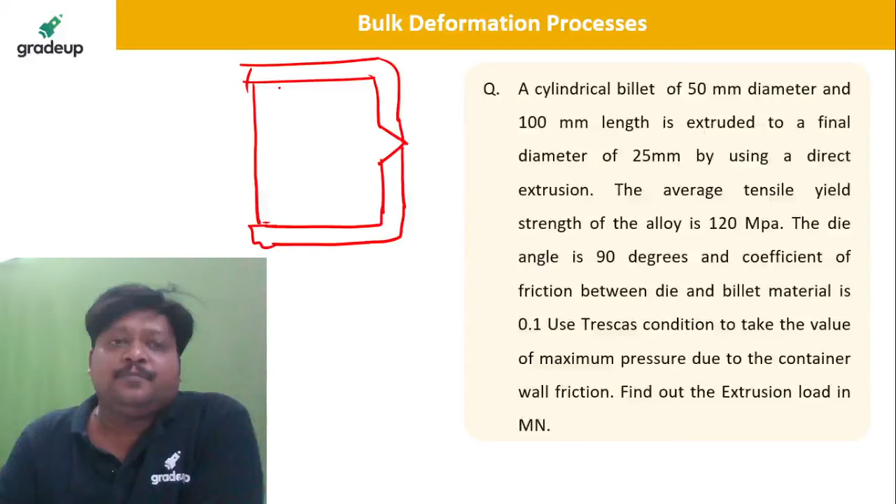If this is a rigid wall container and there is a die, having an included angle given as 90 degrees, so of course I have to show some space, orifice to... suppose it is here like this and you are getting the product here. This is the ram, this is the ram, and this is the billet.

So now here the billet material, cylindrical billet, has 50 mm diameter. So diameter is given, 50 mm. And the length of the billet is, actually it is 100 mm.

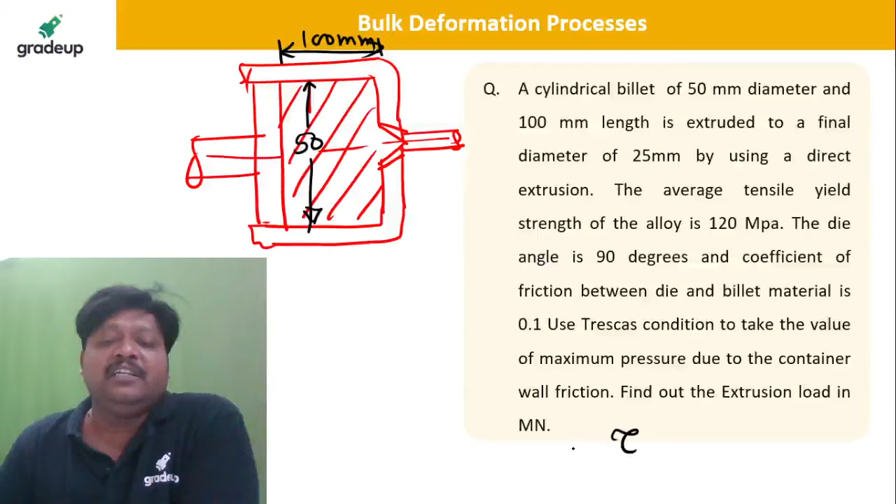So definitely the container shear stress is going to come into the picture, which they say is found by using Tresca's condition to take the value of maximum pressure due to the container wall friction, that is tau we need. Because of the container wall friction, the frictional force or frictional stress we have to calculate will be equal to 4 tau L divided by D, or D naught, the original diameter of the billet. For that, using Tresca's criteria, take that maximum pressure due to container wall friction. So how much is the tensile yield strength? It is 120 megapascal.

Using Tresca's criteria, this tau will be equal to sigma y by 2, which is 120 divided by 2, that is 60 megapascal. That will be the frictional stress.

Frictional shear stress on the wall of the container we have to take into account, which is other than the drawing stress sigma d, isn't it? So tell me, yes, first what do we need to do?

So original area is how much? Original diameter of the billet, D original, I will write here, D original 50 mm. D final, what is the product diameter? Final diameter cross section, to a final diameter 25 mm.

Then what they are saying, the sigma y or sigma flow is given, the die angle is 90 degree, so that is alpha, you have to take it as 45 degree. The coefficient of friction mu is 0.1.

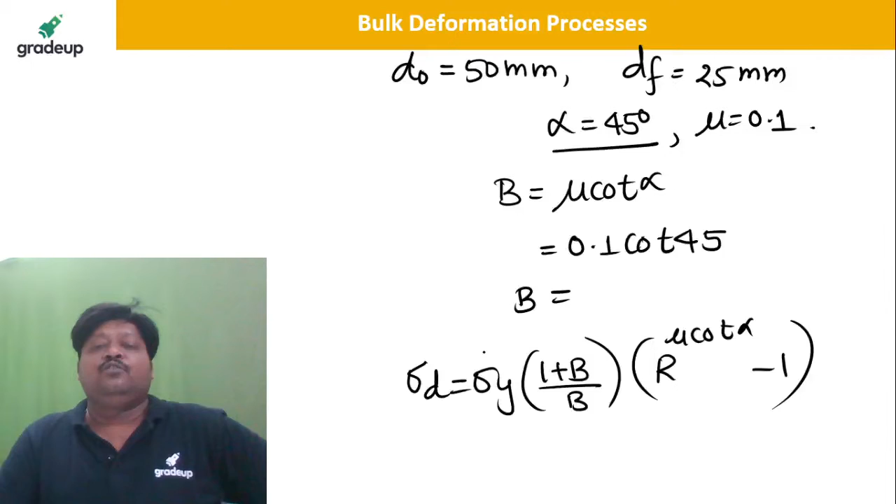Extrusion ratio. Tell me, what is this 0.1 divided by tan 45? It is 0.1. Sigma y is how much? 120 megapascal. So extrusion ratio is how much?

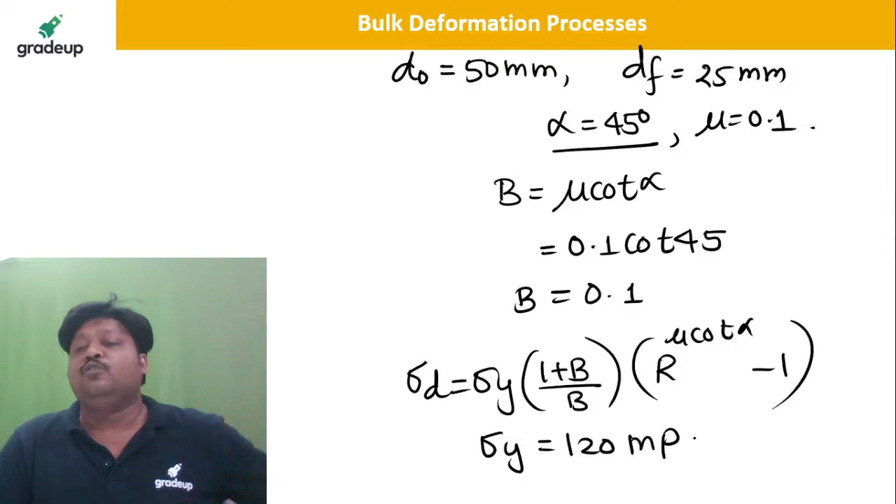R, extrusion ratio, which is equal to A original by A final. This is the extrusion ratio, isn't it? A original by A final, which is equal to what? A original is pi by 4, diameter original 50, that is 50 by 25 whole square. Pi by 4 gets cancelled out.

Anybody there to calculate the values? So R is how much? 2 square, that is R is equal to 4. Extrusion ratio R is equal to 4.

Now tell me, I can write here, sigma d is equal to sigma y, 120, into bracket 1 plus b is how much, 0.1, divided by b 0.1, into bracket R 4 to the power b, mu cot alpha, is 4 to the power 0.1, minus 1, into 1.1 divided by 0.1 into 1.

So check it out whether it is 196.28 megapascal. Have you got this value for the sigma d?

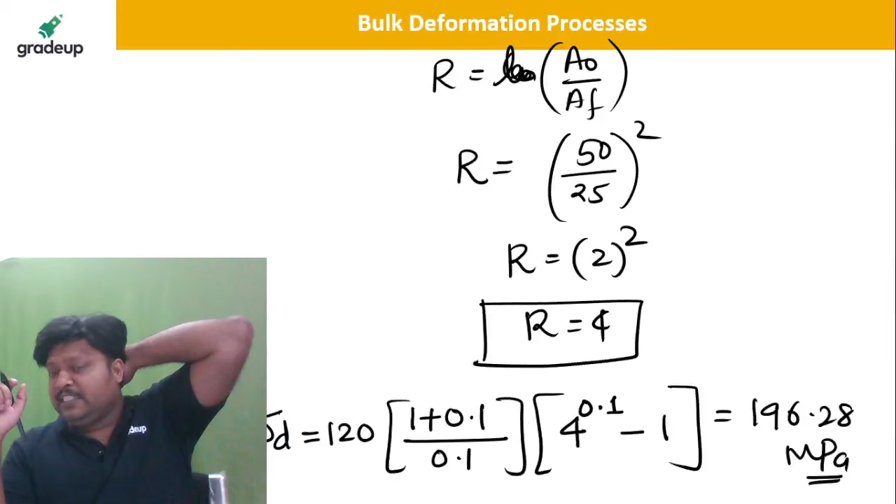Now tell me, yes Sri Kumar. Very good Sri Kumar, it is 196.28. Very good, very good, 196.28 has come. Now what is the next thing?

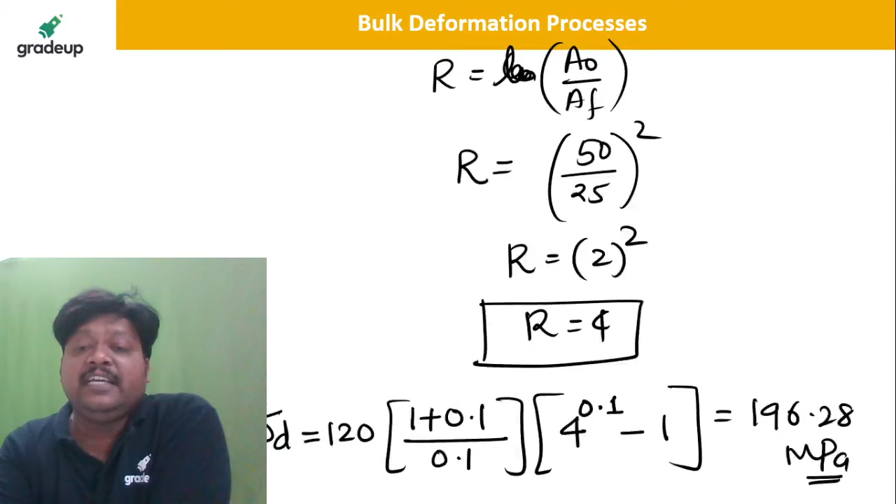Next thing is the total stress, because what they are saying, the total drawing stress, if I want this, then I have to add sigma d plus sigma frictional, because container wall friction is given and that resistance is given there, and for that they say to take Tresca's condition for the maximum pressure due to the container wall friction.

That was how much? This sigma f is equal to 4 tau L divided by d naught, where tau by Tresca's criteria we can take as sigma y by 2, isn't it? By Tresca's condition, this is 0.5 times sigma y. So definitely it is 60 megapascal.

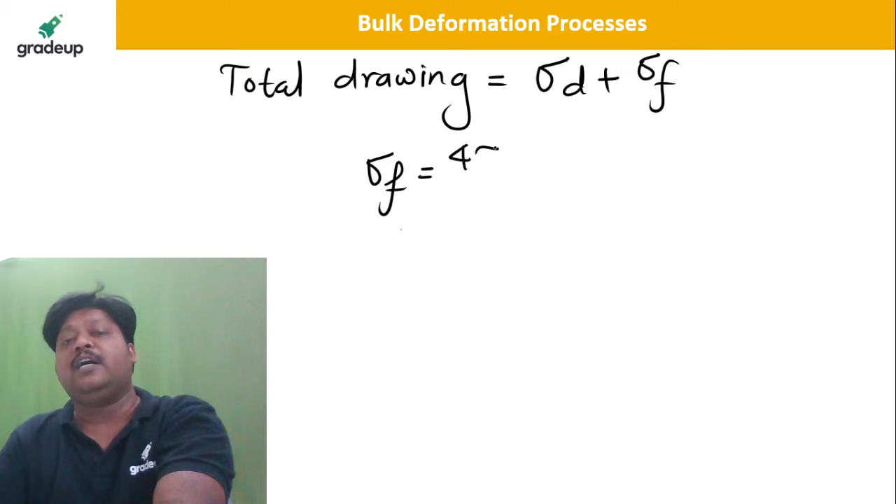So calculate the frictional force, the sigma frictional stress on the container wall. It is sigma f, sigma frictional is equal to 4 tau, this L is length of the billet divided by d original, which is the diameter of the billet. So tell me, 4 into tau is how much?

60 into length of the billet is how much, 100 millimeter, divided by diameter is how much, 50 millimeter. So how much is the sigma f? 240 into 100 divided by 50, so it will be 480 megapascal.

So sigma f, please check it out, please check it out, right? So what is 677? Okay.

Now tell me, if this is the sigma f, now what is total sigma t? That will be 196.28 plus 480 plus, 196.28, it will be 677. Very good.

676.28 megapascal. Very good. So this is the total stress because of the friction at the container wall and the drawing stress. Totality in total, the drawing stress was 676.28 megapascal. Now the next thing is very easy.

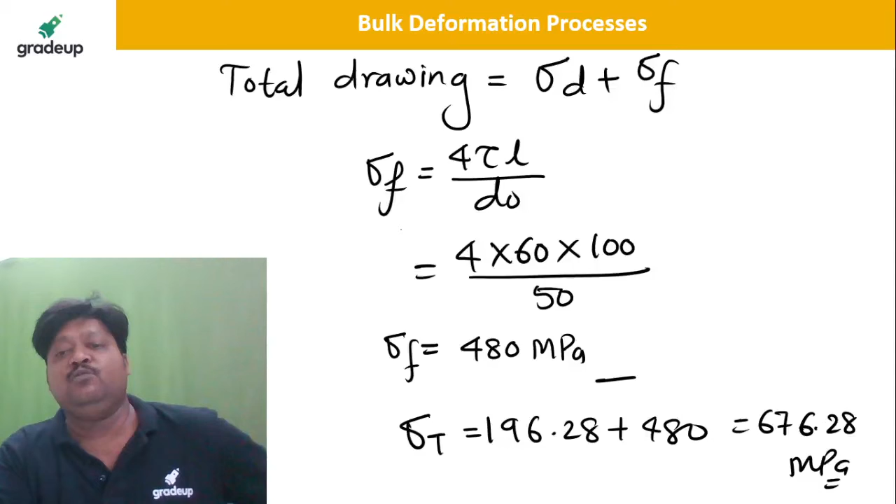What are they asking? Find out the extrusion load in meganewton. How to calculate load? Force is equal to sigma total into area. Now we have to take original or final area. It will take the original in case of extrusion, and final area in case of wire drawing. So sigma total is 676.28 into the original cross section area of the billet.

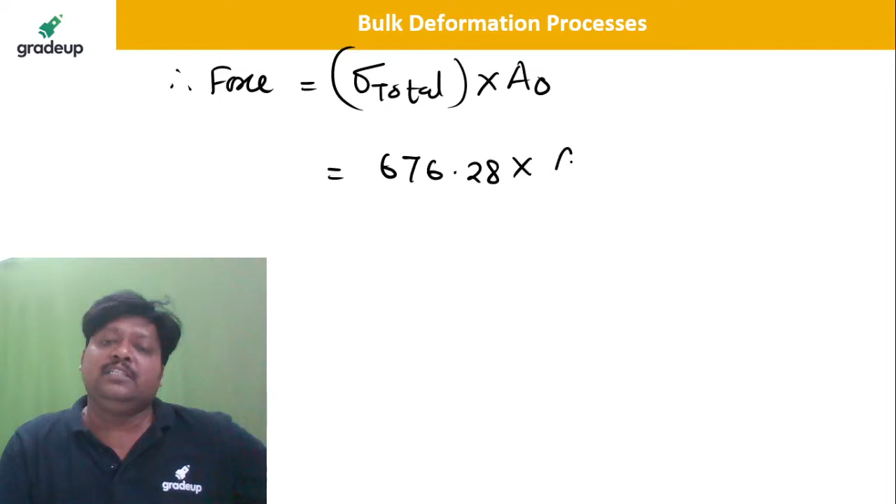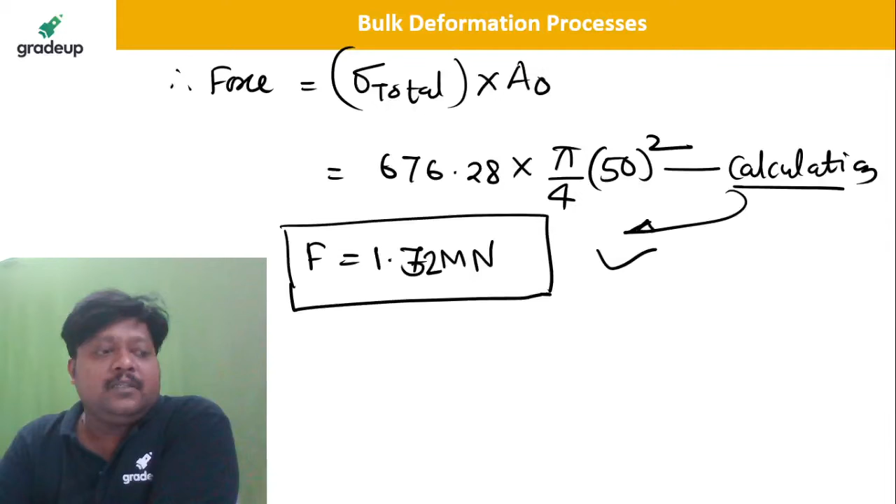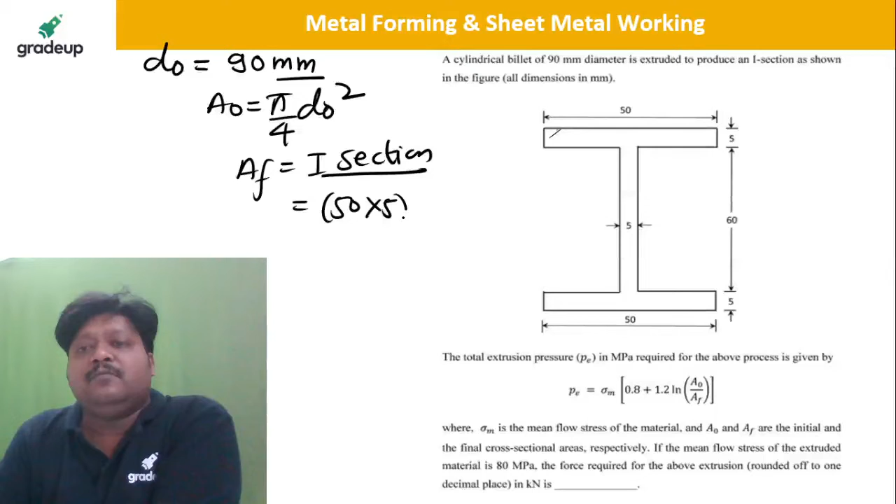Dear students, a cylindrical billet of 90 mm diameter, D original was 90 mm, extruded to the I section as shown. This is the I section, okay, all the dimensions are given. So what is the original area? That is of course pi by 4 D original square, and final area is in terms of the I section cross section area. It will be 50 into 5, plus 60 into 5, plus again 50 into 5. So it will be 2 times 250 plus 300. How much is it? 500 plus 300, that will be 800 mm square, because all the dimensions are in mm.

Original area is how much? Pi by 4, the billet cross section area, diameter 90 mm. So 90 square into pi divided by 4. So original area you are getting as 6361.72 mm square. And then if I calculate the extrusion ratio R, that is A original by A final, that is nothing but what? How much? A original by A final, R is nothing but A original by A final, the extrusion ratio.

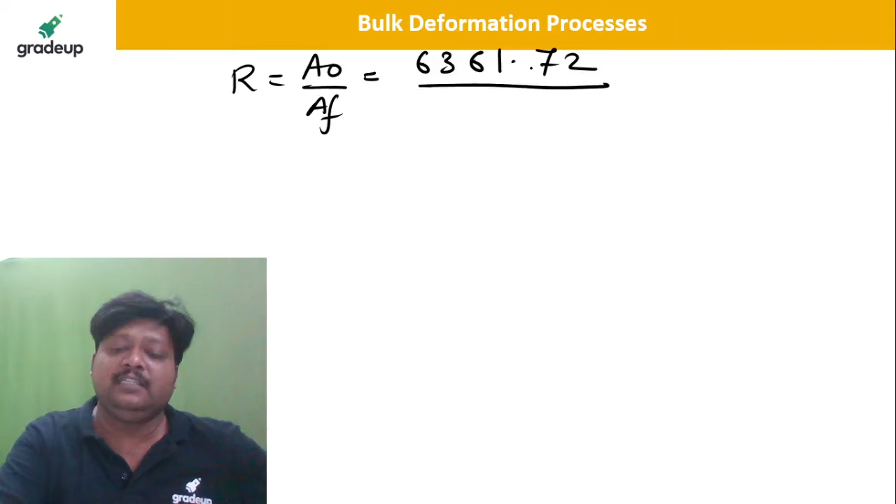A original is how much? 6361.72 divided by A final, which is 800. It will be 7.95. This is our extrusion ratio.

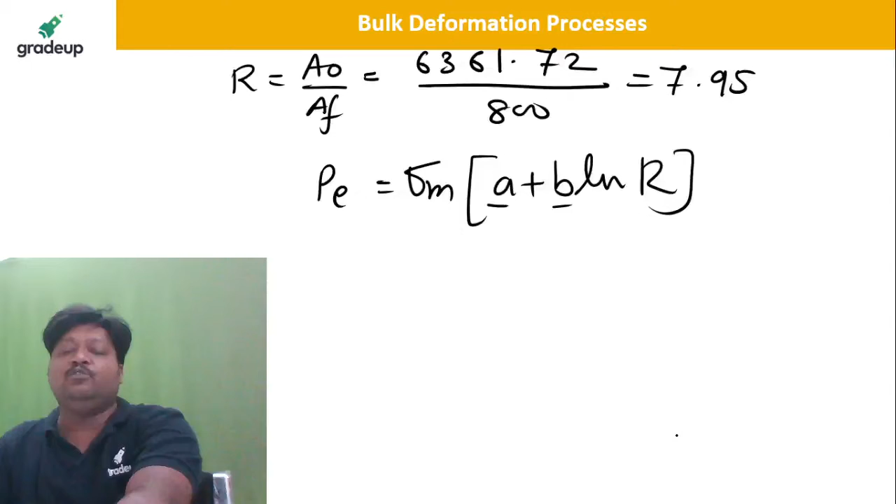And what they are saying, this is according to Johnson's rule. They have given the extrusion pressure PE, which is sigma m into bracket A plus B ln of R. This is the standard formula by Johnson's equation, where A and B are the constants already given, and sigma mean flow stress is 80 megapascal. So I will write 80 into bracket A, which is 0.8, plus B 1.2 into ln of R, we calculated here 7.95. So ln of this answer into 1.2 plus 0.8, into 80, I am getting the extrusion pressure or drawing stress as 263.05 megapascal.

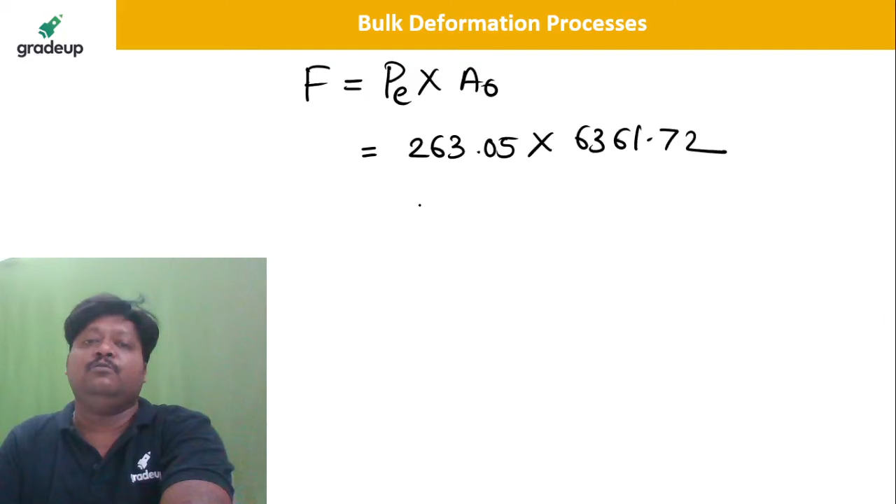And what they are asking? They are asking the load in kilonewton to extrude this I section. So definitely the load F is equal to PE, that is our drawing stress, into original cross sectional area. So P is 263.05 into original area we already calculated, which is 6361.72.

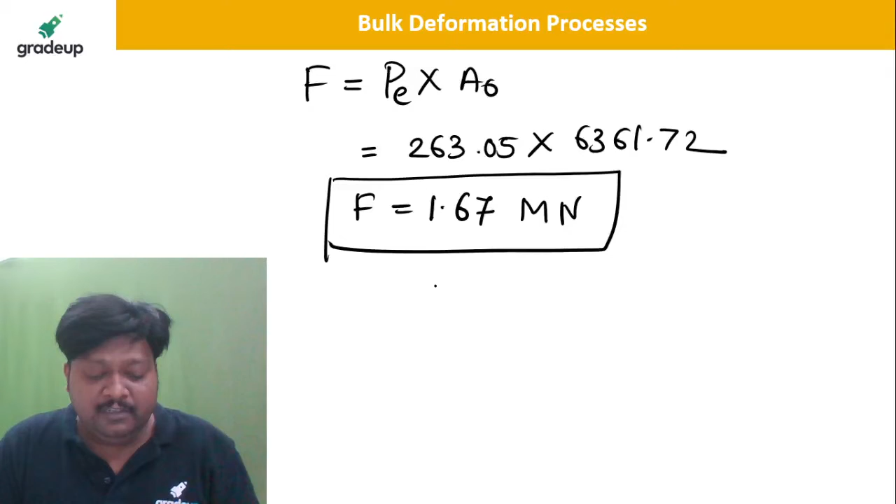It will be 1.67 meganewton. Okay, the load will be 1.67 meganewton, or if they are asking in kilonewton, it will be 1673.45 kilonewton. I hope it is very easy.

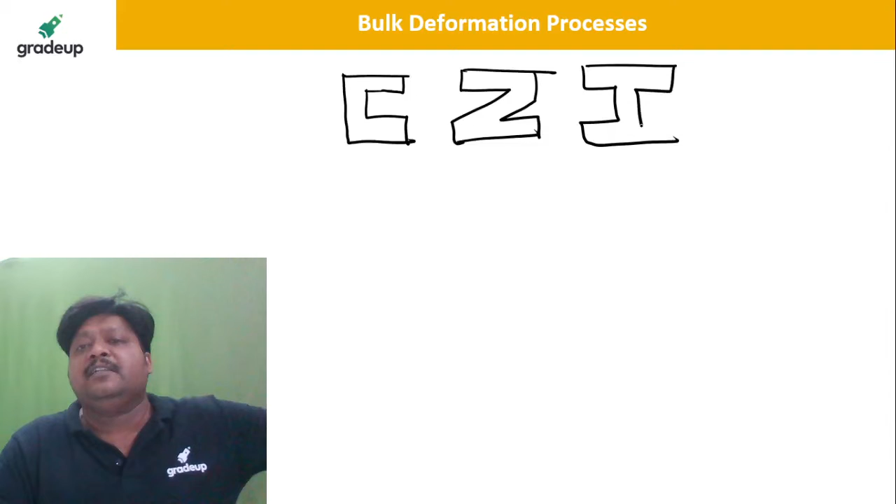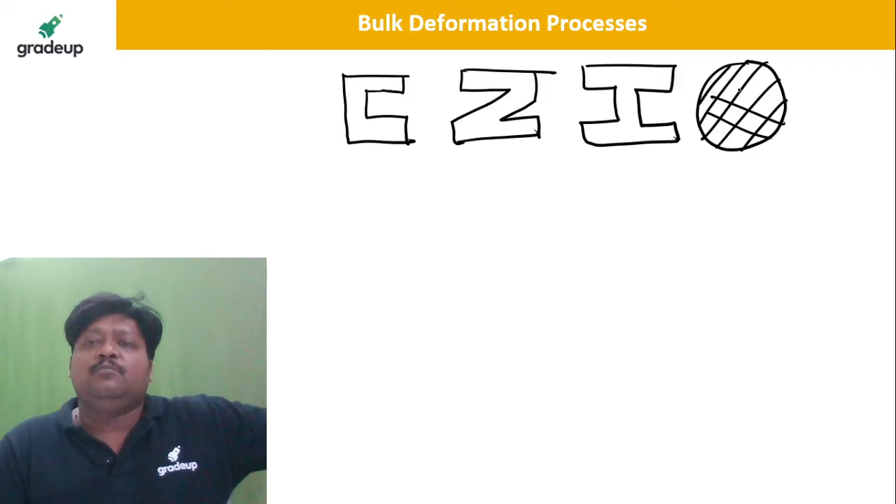Okay, it may be like this I shape, as given here, or circular - common, right? So all the shapes can be made by this extrusion process that you know. Generally we have a habit to have the circular cross section always, but here they have given a different I section. I hope it is clear.

Okay, shall I go for the next? Where is... other people's? Why are you not calculating the things?

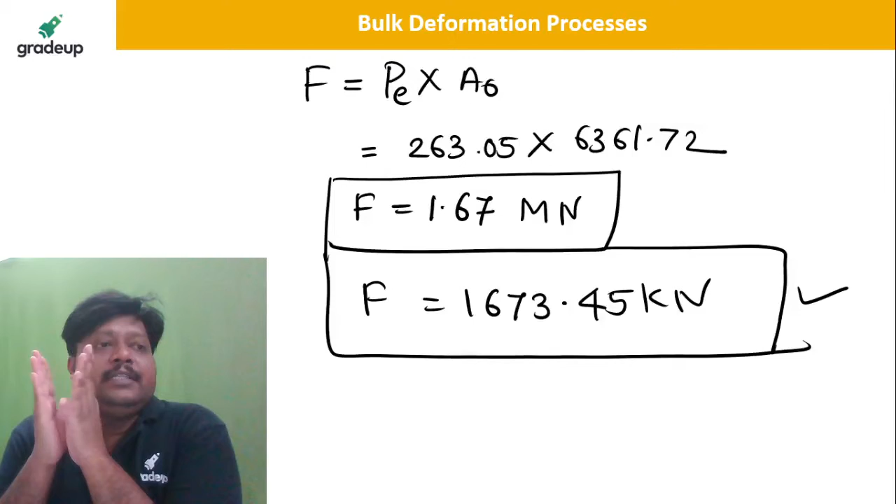Check it out whether 1.67 meganewton is correct or not. Dear students, please do the calculation. This was the question and we have solved it.

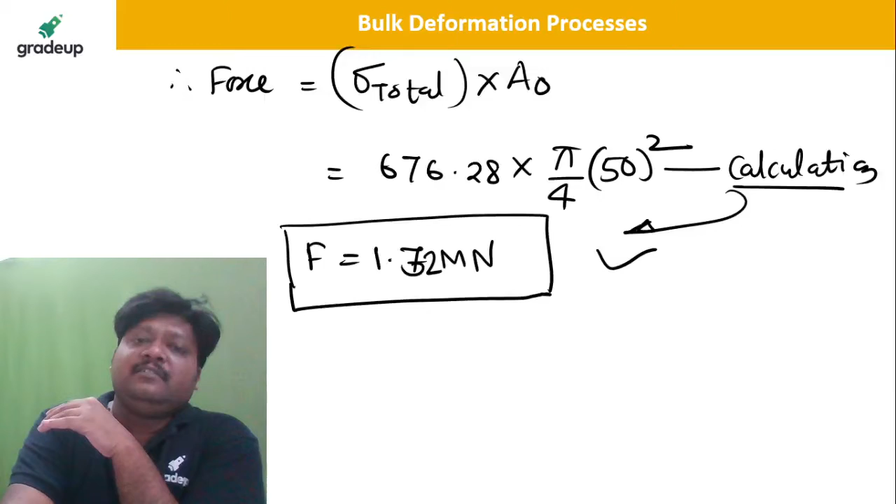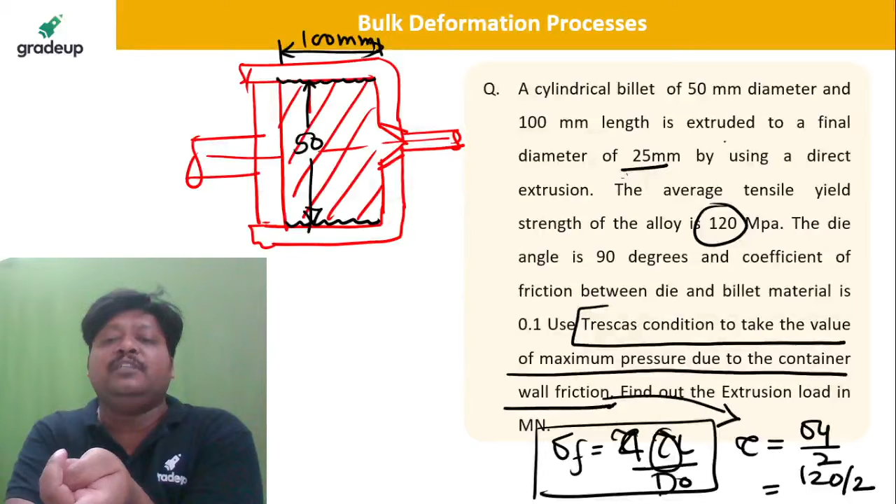This was one more question, again on extrusion. Apart from the normal things, we try to add complexities, as here we add the container wall friction. So we have to add that frictional stress, because we have the value of this tau given there. This question is also a little bit different than the regular practice, so we have taken it here. I hope it is clear.

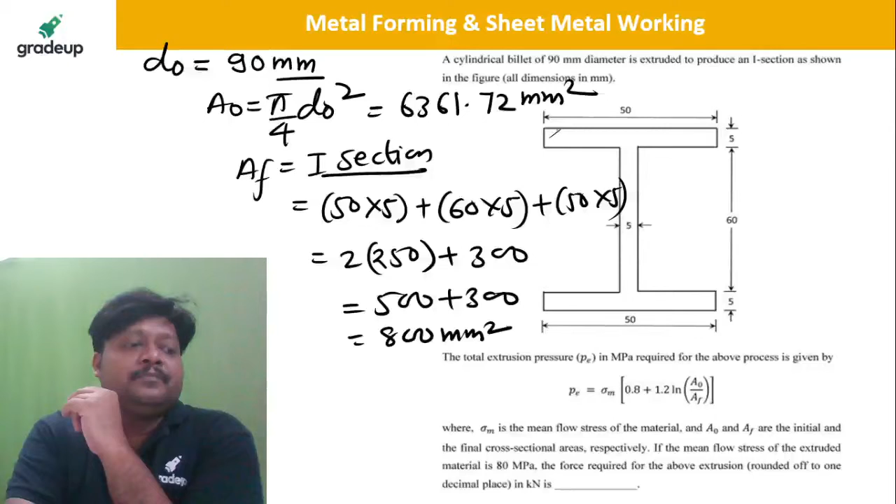Yes, next. Now we will start with the questions related to sheet metal working. Okay, fine, take the question.

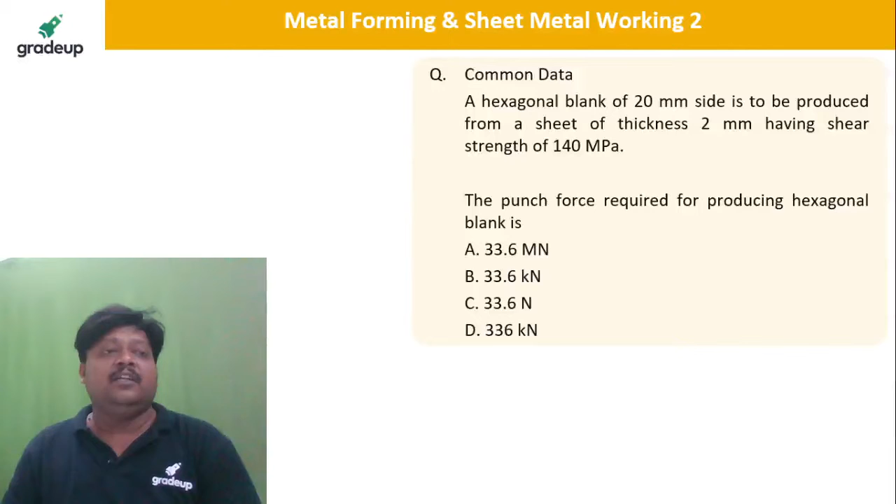A hexagonal blank of 20 mm side is to be produced - 6 edges are there for the hexagon. The sheet thickness is 2 mm, and the shear strength is 140 megapascal. So they are simply asking for the punch force.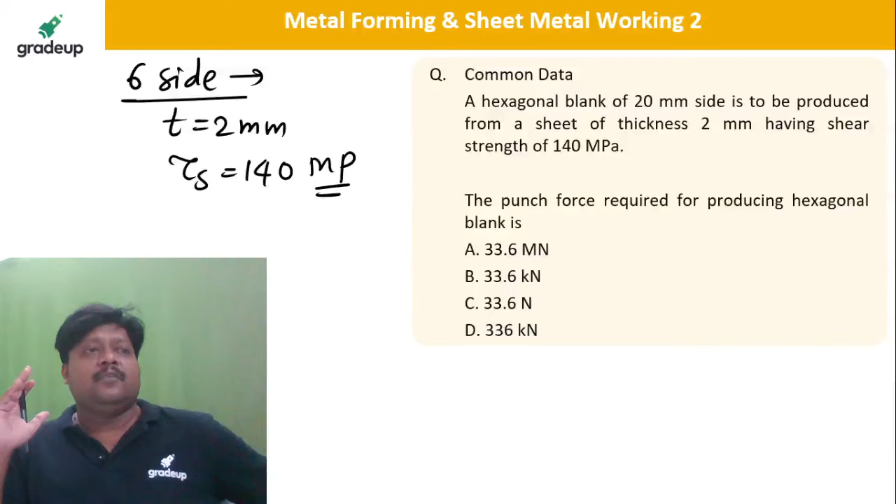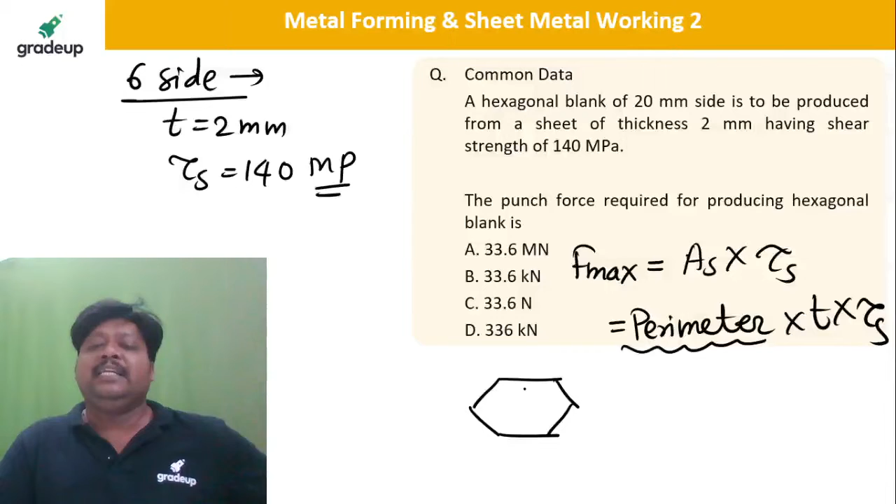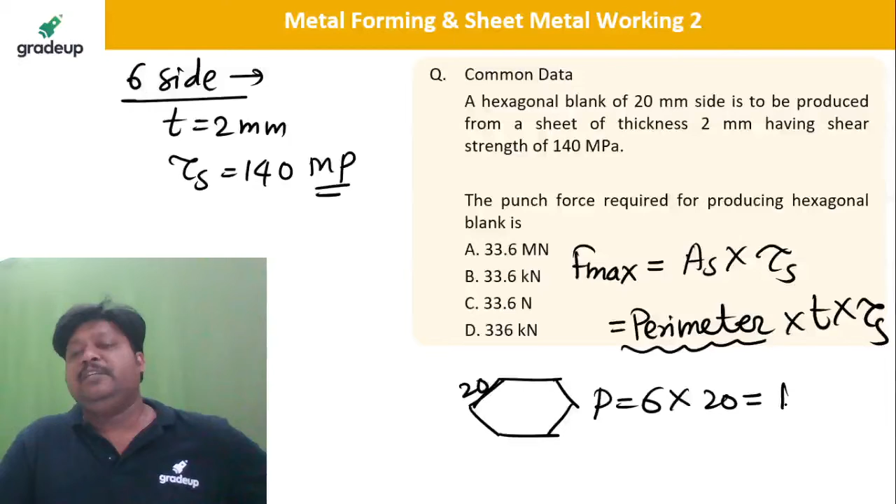Tell me, you know that the maximum force F max in the sheet metal operation is equal to the sheared area into shear strength of the material. Sheared area is calculated as perimeter into thickness into tau s. So perimeter here - it's a hexagonal blank, isn't it? 6 faces of 20 mm side. So perimeter is 6 into 20, which is 120 millimeter.

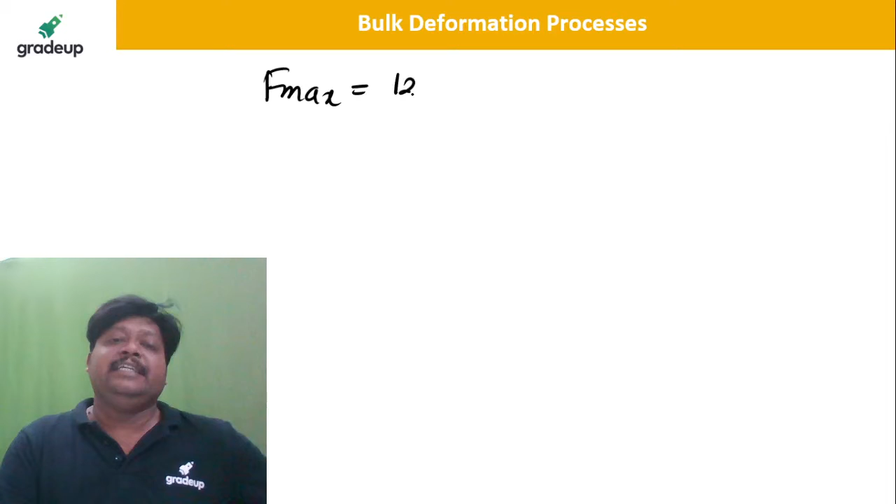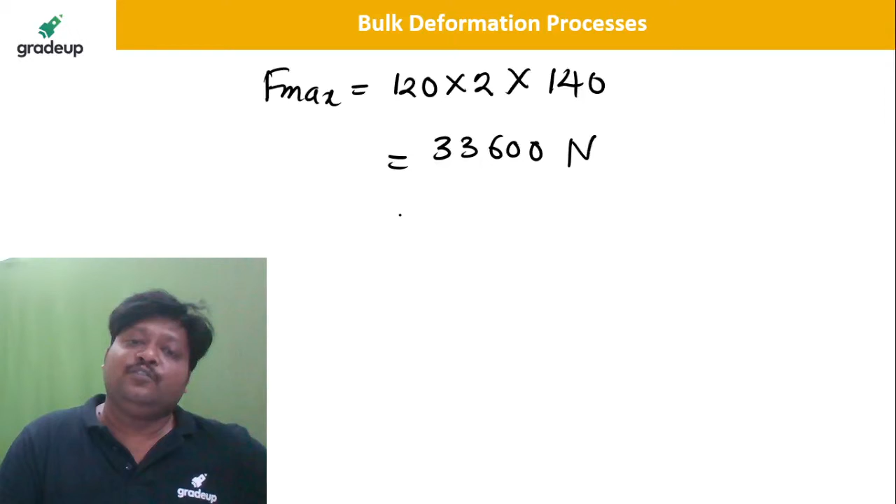So if I calculate this, F max is equal to 120 into thickness 2 into shear stress 140. How much is it? 120 into 2 into 140, which gives 33600 Newton, that is 33.6 kilonewton. This is the F max in the sheet metal working.

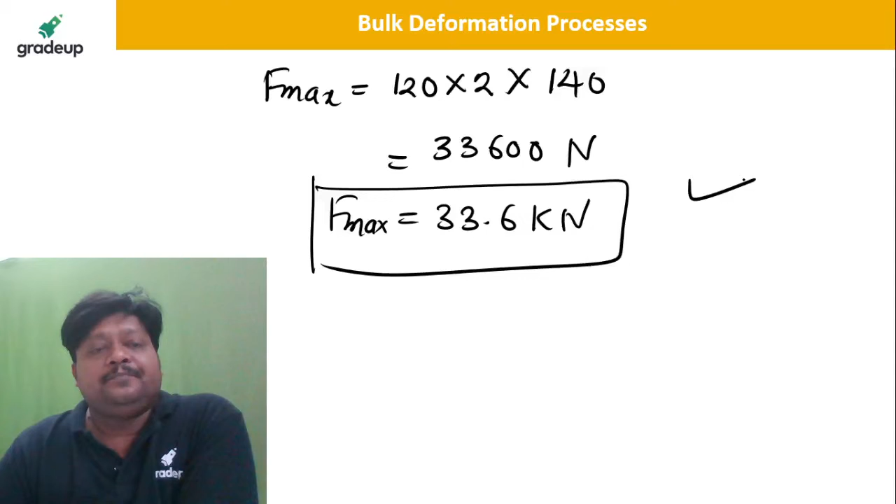So shall we go for the next question? We'll go for the next question. Now again in the same question, because it is a common data question, data is given to you.

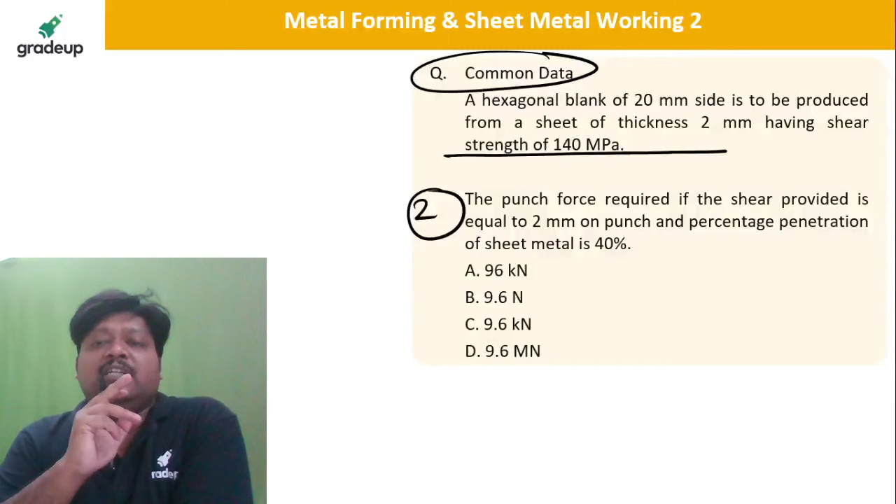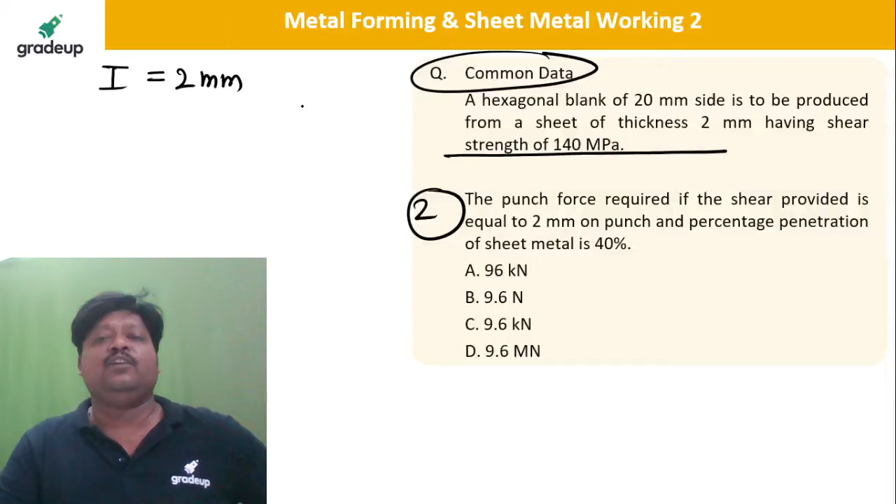Now the second part of this question is given to you: the punch force required if the shear provided is equal to 2 mm on the punch. This is punching operation, that is why shear is provided on the punch. The penetration K is given as 40%, which is how much the punch is penetrated into the sheet to cause the work done.

So whenever shear is provided, the force FB, when shear is provided, is equal to F max into KT divided by KT plus l. Calculate FB equals F max, which we calculated as 33600, into penetration 0.4 into thickness 2 mm, divided by 0.4 into thickness 2 plus shear we provide, which is also 2 mm. Calculate this.

So into 0.8 divided by 2.8, it will be 9,600 Newton, which is equal to 9.6 kilonewton. How much are you getting?

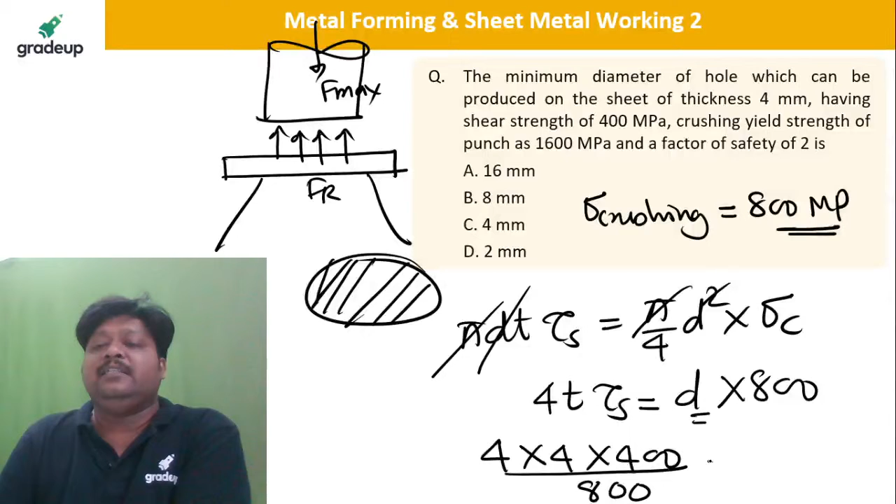So tell me how much it is. So d minimum is how much? It is equal to 8 millimeter. Check it out whether you are getting 8 or not. How much you are getting? Yes, 8 mm, 8 mm you are getting. B for Bombay is the correct answer.

So how this 800? Because we have applied factor of safety, 1600 divided by 2.

So where are you, Akhilesh? Tripathi Rakesh. Pranam Tripathi ji. Akhilesh Khadse, what is the answer?

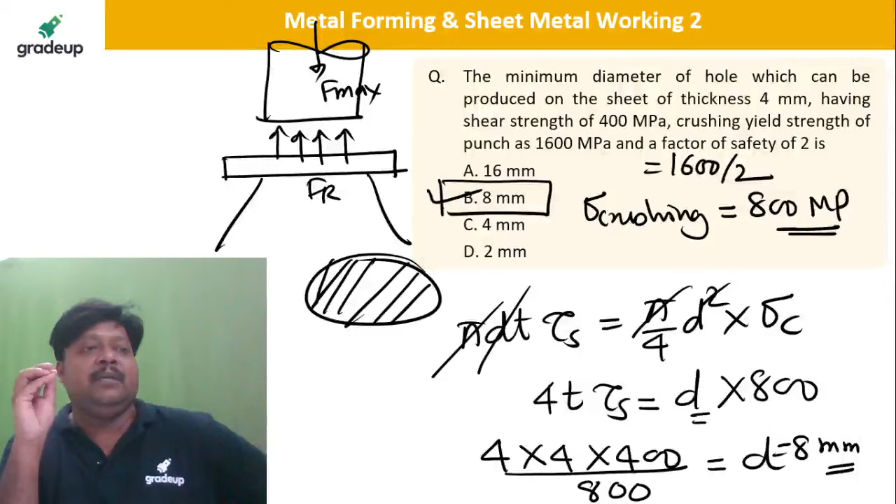So you are getting here 8 mm, 8 mm, 8 mm. Very good. Next question.

Next question: a cylindrical cup of 80 mm diameter, 250 mm height with a flange diameter of 150 mm is produced by using a deep drawing operation for a sheet of thickness 4 mm. Ultimate shear strength is 285 megapascal. The number of ears or earring defects produced around the circumference of the flange is. Calculate this, they are asking you to calculate the number of ears.

Okay, 8 mm, very good, very good. Solve this next question. So cylindrical cup is there, 80 mm diameter. So diameter of the cup is 80 mm. Height is 250 mm.

Okay, flange diameter is also given, flange diameter is 150 mm. This D1 is how much? 80 mm, and height is how much? 250 mm.

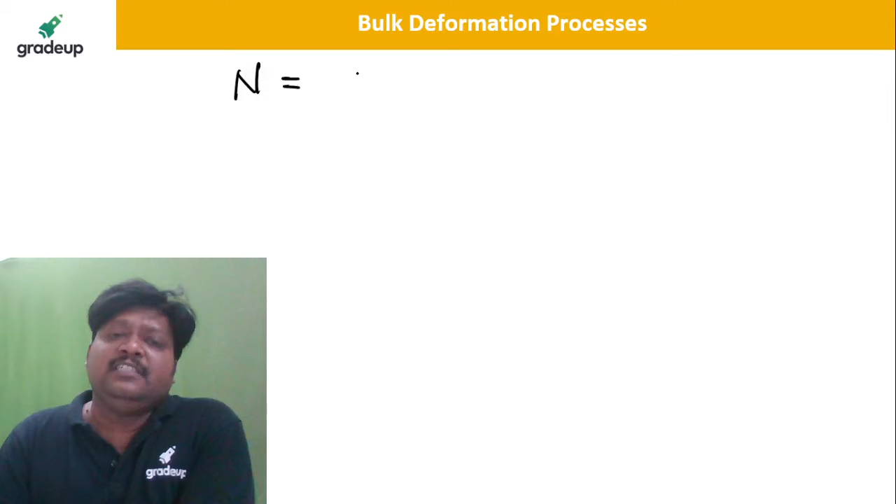So can anyone tell me the answer? Dear students, you know that if you go on calculating the number of ears, this is given by a very empirical or experimental result: 2 to the power n, where n is the integer which depends upon the material. Whether you are having lubrication, bending, these all are overcome in this integer n. So n is equal to what? Number of ears which are equal to 2 to the power n.

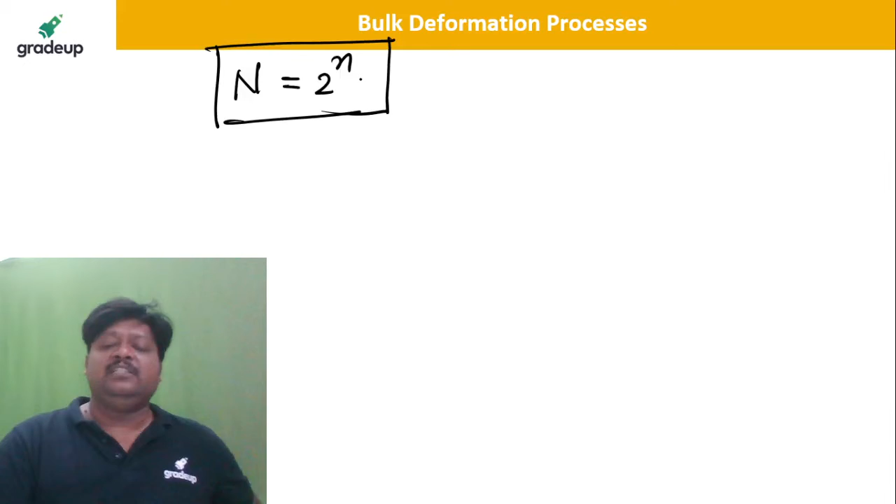So if you just look at the options, which is the option that fits 2 to the power n? These are nothing but the number of ears, where n is an integer depending upon the material, then friction and bending, on these things the value of n depends. So please tell me what is the correct answer.

What is the correct answer now? Among options A, B, C and D, only option C fits very nicely with this formula of 2 to the power n. Why C? Because 2 to the power n only fits. So if you have 2 to the power 6, how much is it? 2 to the power 6 is 64, 2 by 2 by 2 by 2.

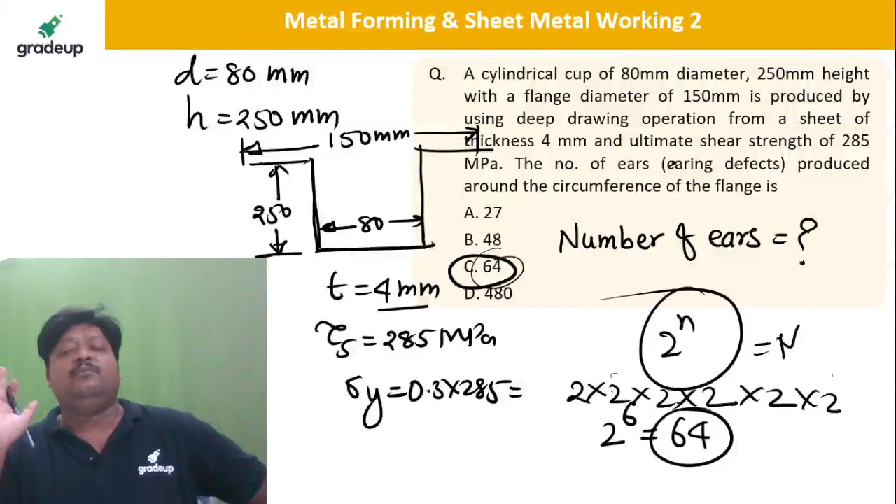So 2 2s are 4, 4 2s are 8, 8 2s are 16, 16 2s are 32, and 32 2s are 64. That is correct, 64. 64 is the only correct answer. No need to look here and there at what is given and what is not given. The only formula is this, 2 to the power n.

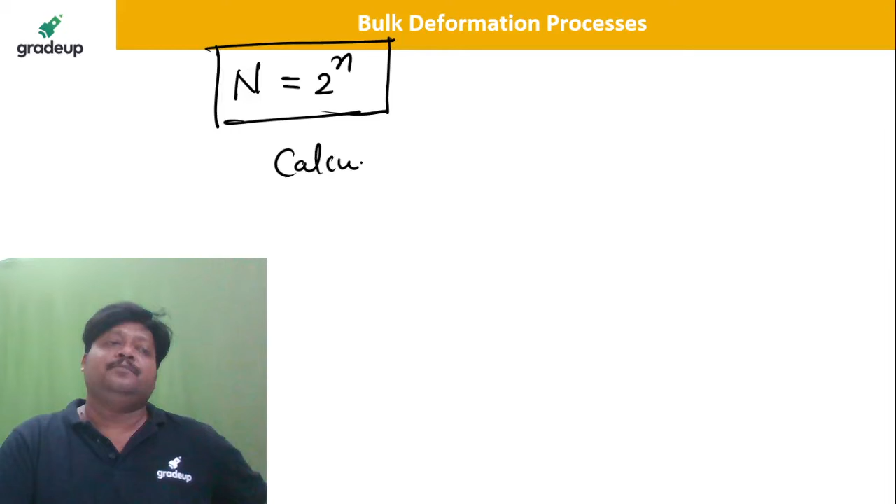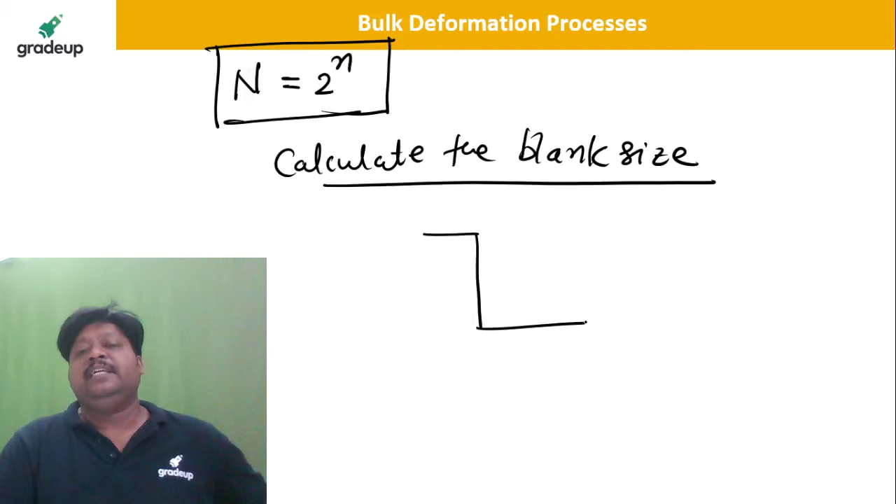Now suppose if anybody asks you to calculate the blank size for this, calculate the blank size. For this, whenever the flange is there, this is D1, this is D2, and the height is given to you. This is the height.

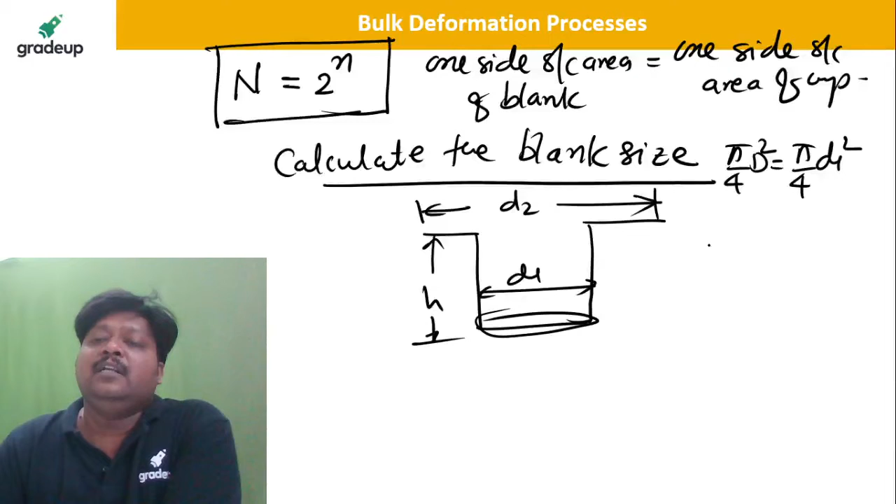Calculate the blank size for this particular data where the flange is there on the cup. So how is it calculated? One side surface area of blank is equal to one side surface area of the product. Product is our cup. One side surface area of cup: pi by 4 d square is equal to pi by 4 d1 square, this is one side, plus pi d1h, and when you look from the top you get this flange, whose surface area is pi by 4 into d2 square minus d1 square. So ultimately d square is d2 square plus 4 d1h. Corner radius is not given, so no need to worry about checking the d by r ratio.

So d2, the flange diameter, is 150, whole square, plus 4 into d1 which is 80, into height which is 250. Tell me, what is the blank size? D will be how much? Please write here, calculate this and tell me the answer.

So from my side it is coming as 320 millimeter, for this blank size. Please check it out whether it is correct or not. Yes, Sri Kumar, very good, 320.1, very good, excellent.

Very good. Anyone else who can tell me the answer? Or not interested? Yes, Priyanka, very good, 320.15, that is correct, absolutely correct.

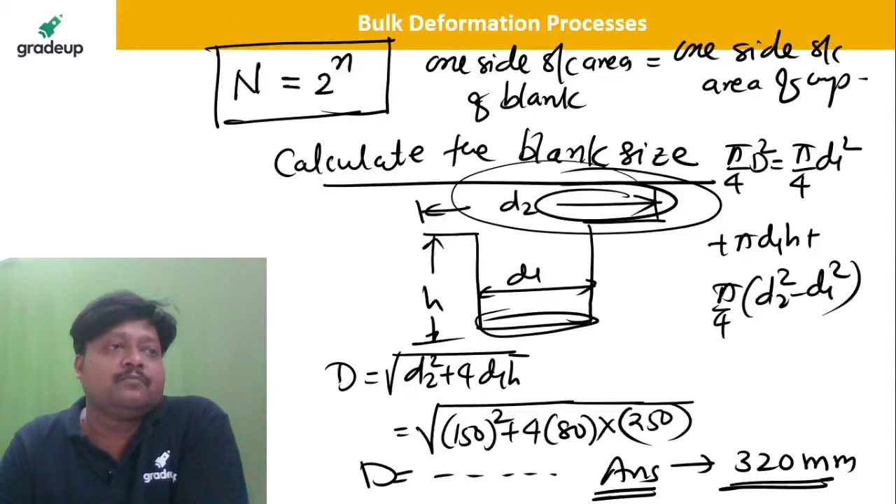An octagonal hole of side 60 mm and thickness 3 mm is to be produced by using the piercing operation. The ultimate shear strength of the sheet material is 315 megapascal. If the energy consumed for producing the octagonal hole is 544 joule, then what is the percentage of penetration?

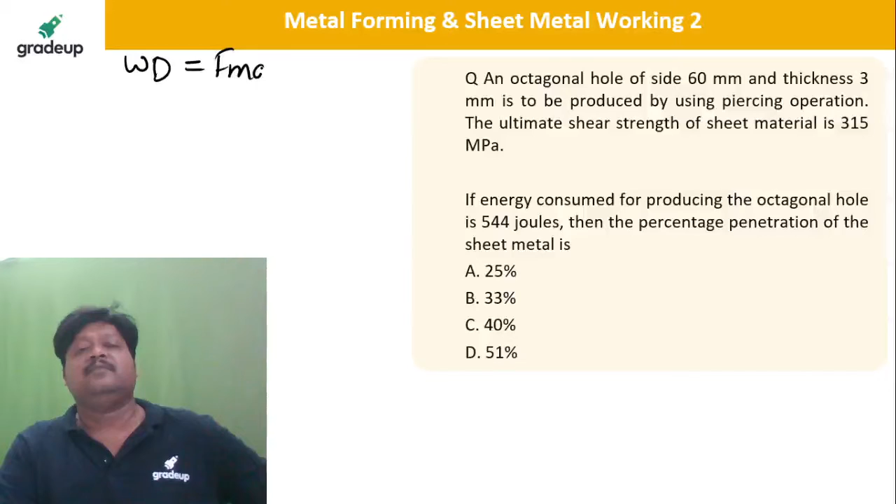So dear students, when you talk about work done with shear and work done without shear, that is a very important assumption in shearing operation in sheet metal working, where we assume this work done is the same, isn't it? So work done or energy, in case when no shear is provided, it will be F max into KT, and when shear is provided, it will be FB into KT plus l. l is the additional distance we have to travel for the punch, that is KT plus l, the total distance. So work done here is how much?

Directly given, that is 544 joule, so 544, it is in Newton meter, which is equal to F max. F max will be how much for this octagonal hole? Sides are how many? 8 sides, so 8 multiplied by 60, it will be 480 mm, that will be the perimeter of this octagonal hole, isn't it?

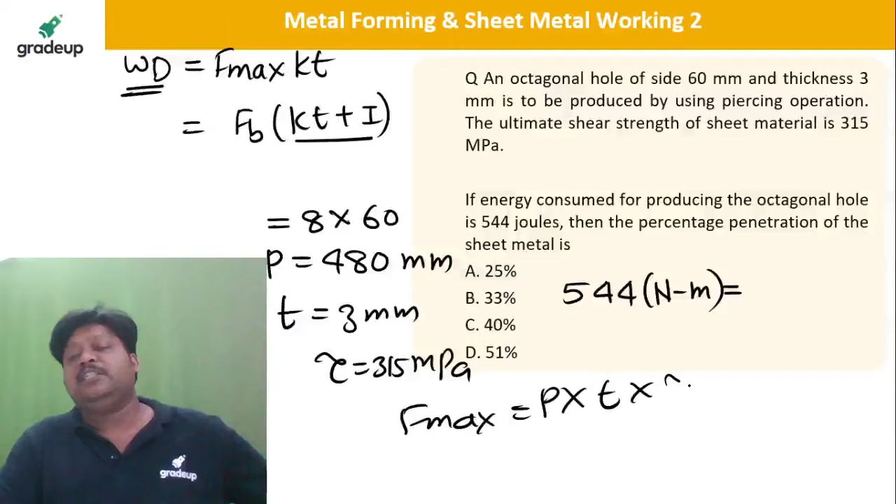Thickness is 3 mm, and shear strength is 315 megapascal. So calculate first F max. F max is perimeter into thickness into shear strength: 480 into thickness 3 into shear strength 315. Tell me, how much is F max? 480 by 3 by 315, so it will be 453,600 Newton.

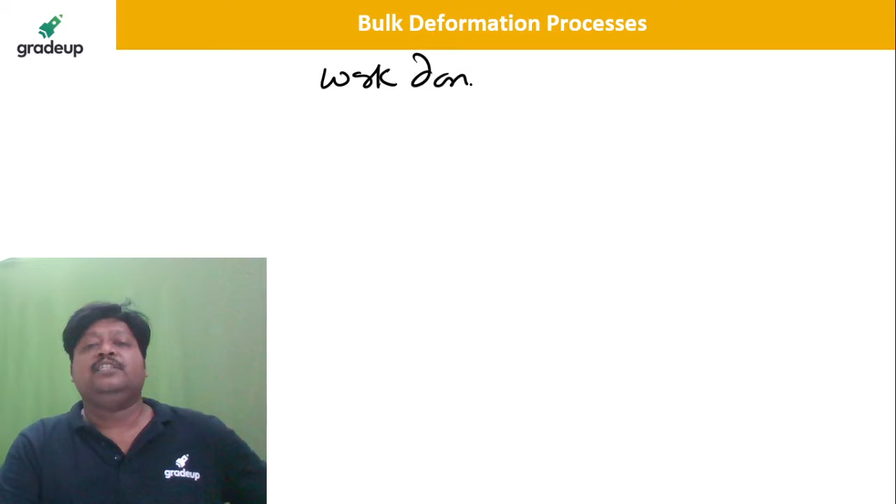453,600 Newton, isn't it? And when you calculate this work done, okay Sri Kumar, work done is equal to F max into KT. So work done is 544 into 10 to the power 3, I am writing in Newton millimeter, because it is Newton meter in joules, is equal to F max which is how much.

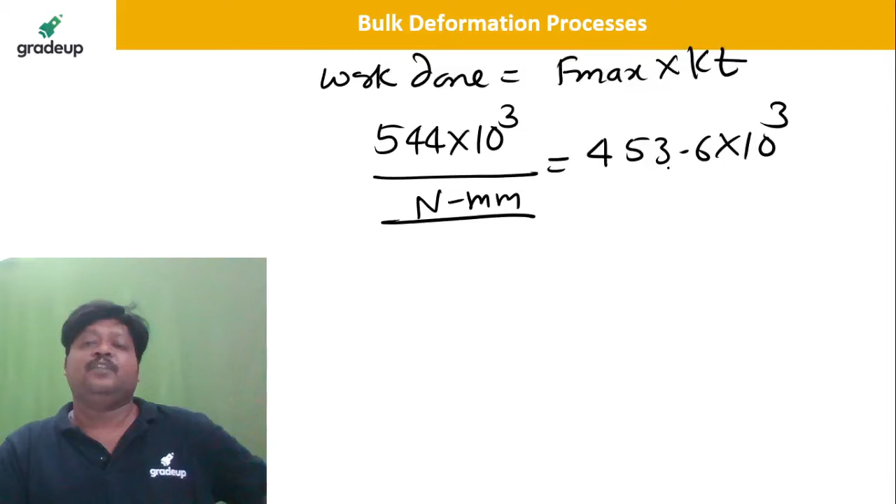453.6 into 10 to the power 3 Newton into K, thickness is 3. So 10 to the power 3 cancels out. 544 divided by 453, divided by 3, that will be K, which is 0.40, which in percentage is 40%.

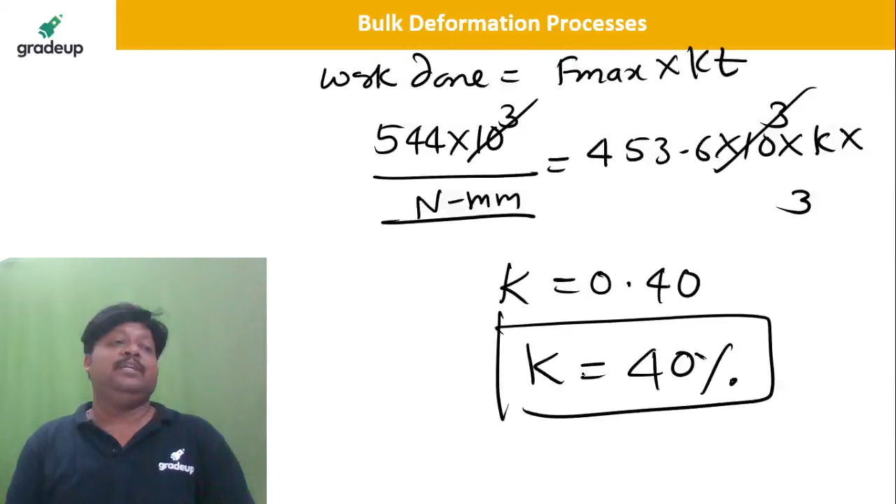40%. Very nice, Priyanka. So yes, option C is correct. Very good. They are asking penetration K is equal to what? 40%, you are getting. I hope it is clear.

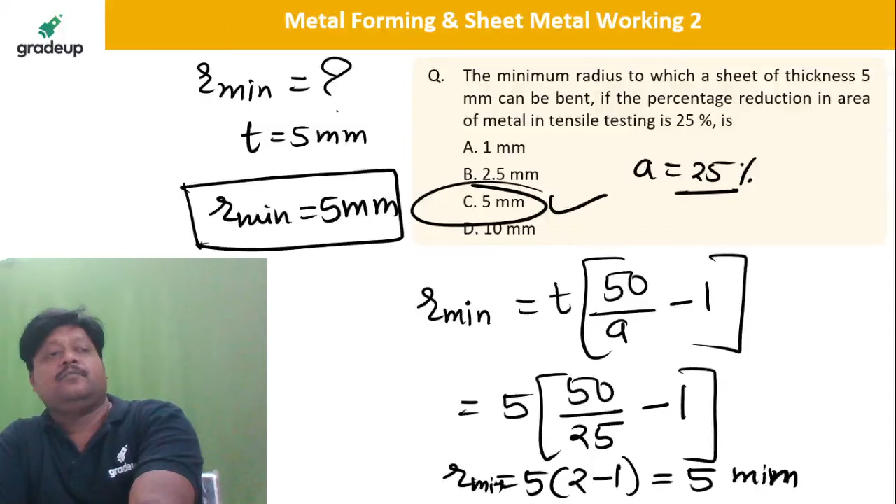Dear students, as you know there are typically 3 basic bending methods: U bending, V bending, and edge bending. V bending is also known as air bending. And you know very well that the ratio of forces for U as to V as to edge bending is equal to 2 as to 1 as to 0.5. That means the maximum force is always required in U bending at the top, then V bending at second place, and edge bending at the lowest. So U bending will be at position 1, V bending at second, and edge bending as number 3.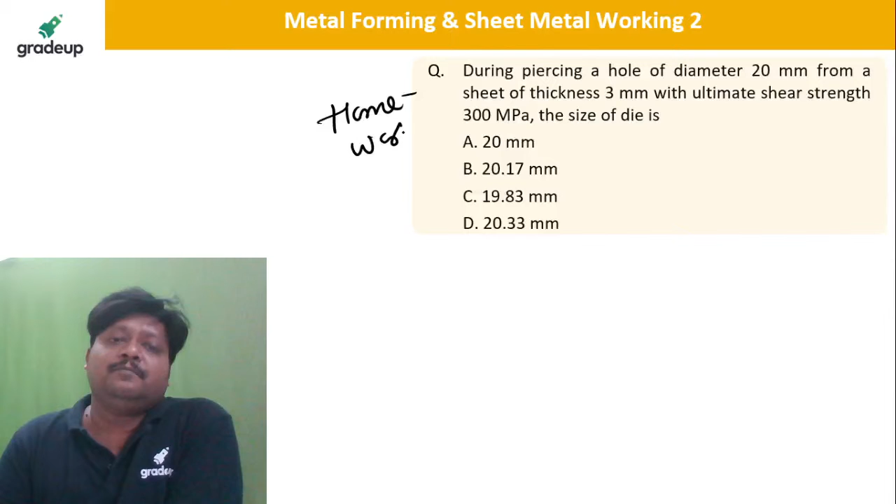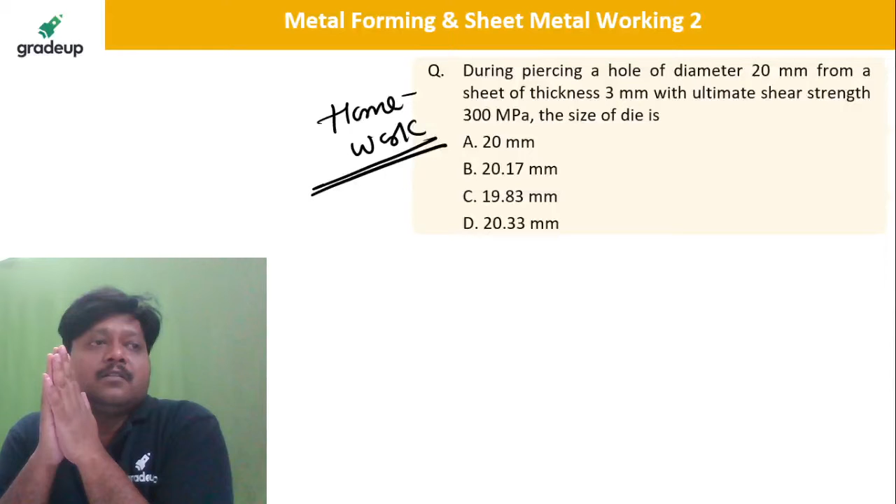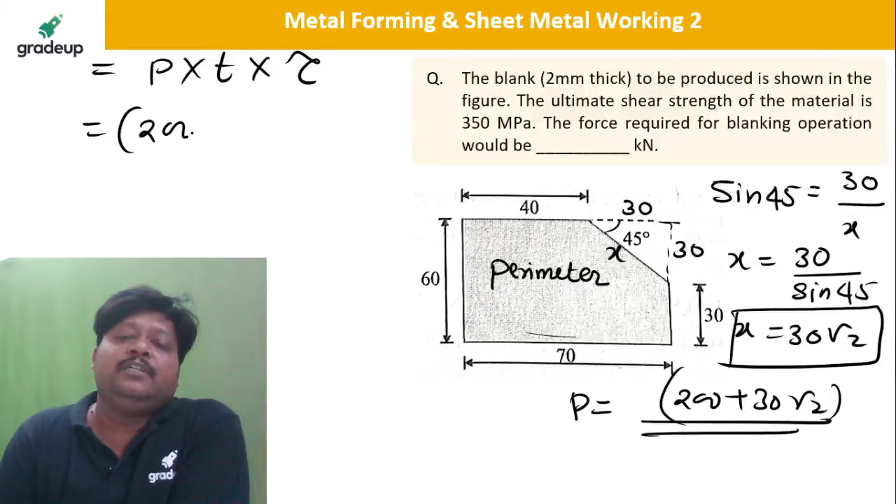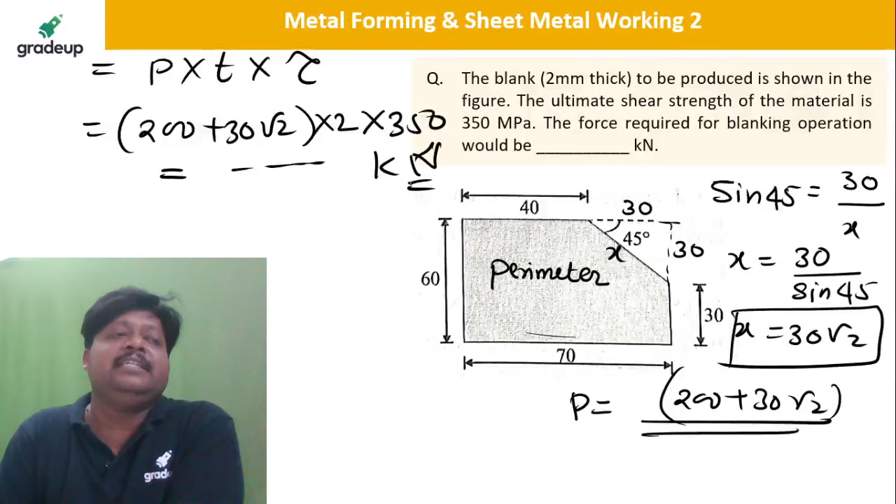Now go for calculation: perimeter into thickness into tau. Perimeter 200 plus 30 root 2, into thickness 2, into shear strength 350. Tell me the value in kilonewton. Very easy, very easy.

This is again a very simple question. In deep drawing, the wrinkling defect is reduced by the provision of the blank holding force, which is generally one third of the force in the drawing operation.

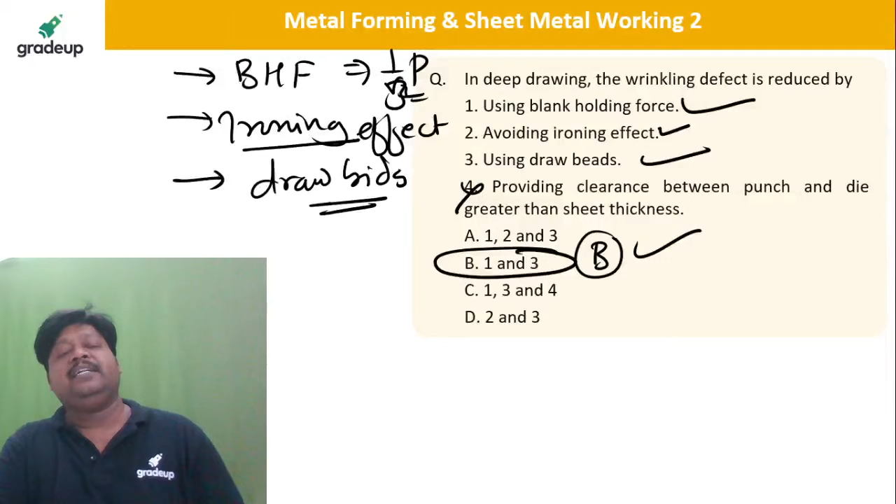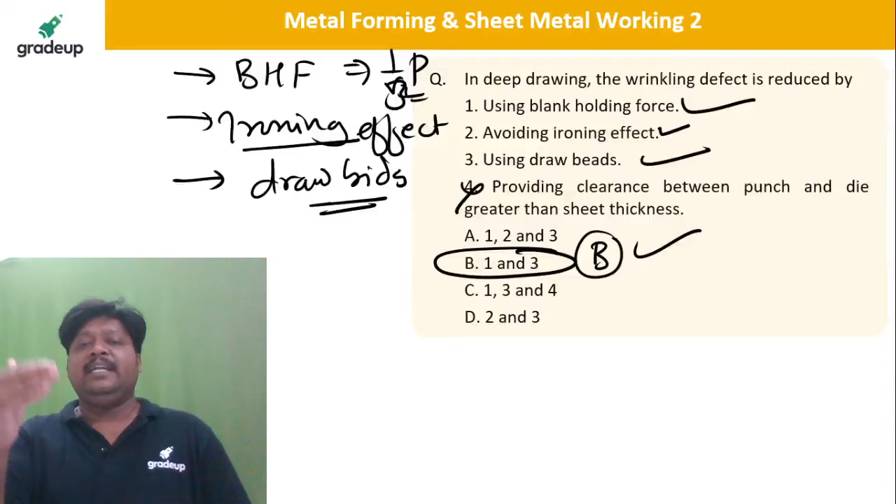Using blank holding force is correct, using draw beads is correct. So 1 and 3 are correct, option B is correct. So you know how to minimize this wrinkling defect: by provision of blank holding force BHF, by provision of draw beads, and by the ironing effect through clearance slightly less than sheet thickness. Statements 1 and 3 are correct, 2 and 4 are wrong.

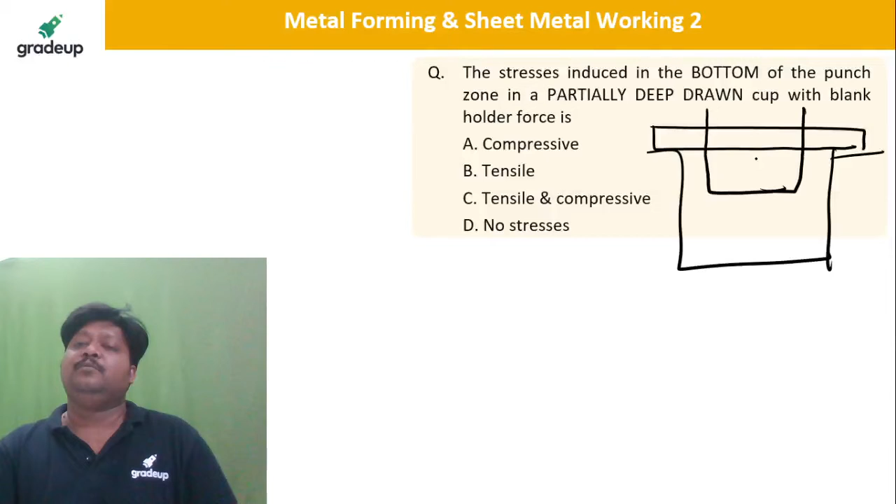Now consider the partially drawn cup in the bottom of the punch zone, in partial deep drawing, along with the blank holding force. At the bottom, if you look at a partially drawn cup, this is the flange portion number 1, this is the deformation zone 2, and this is flange portion 3. In the deformation zone, the stresses induced are pure tensile stress only. At the bottom generally there are no stresses.

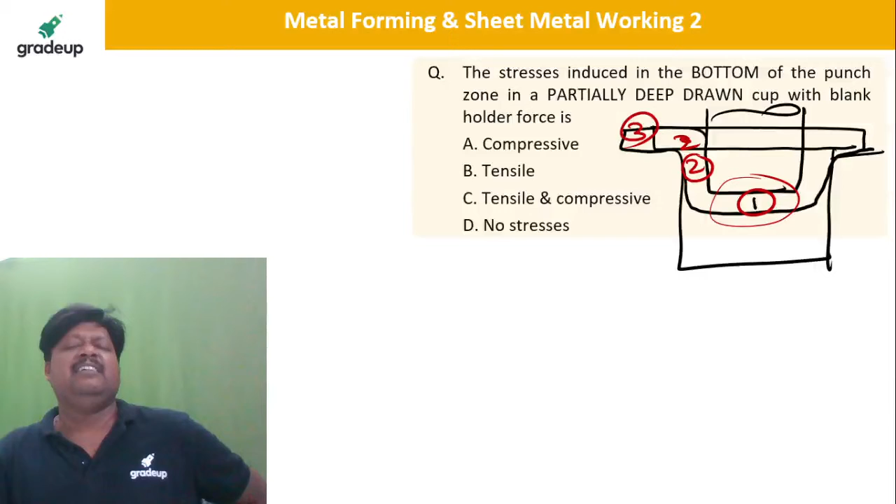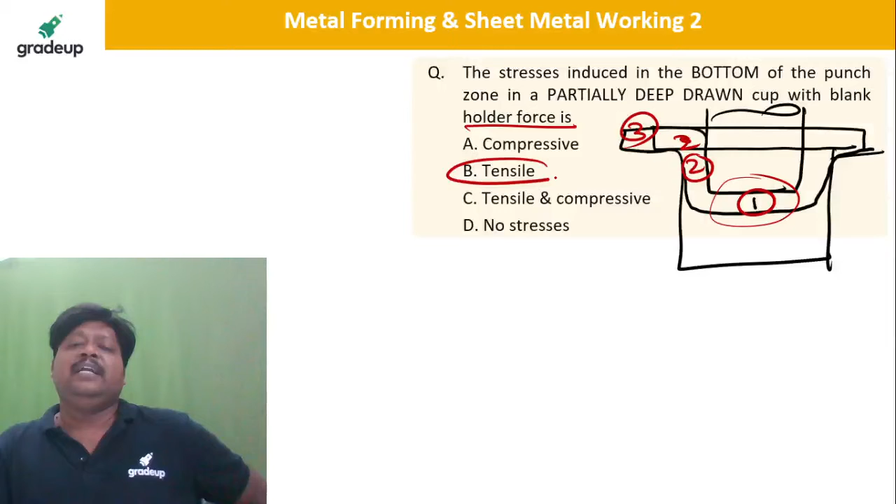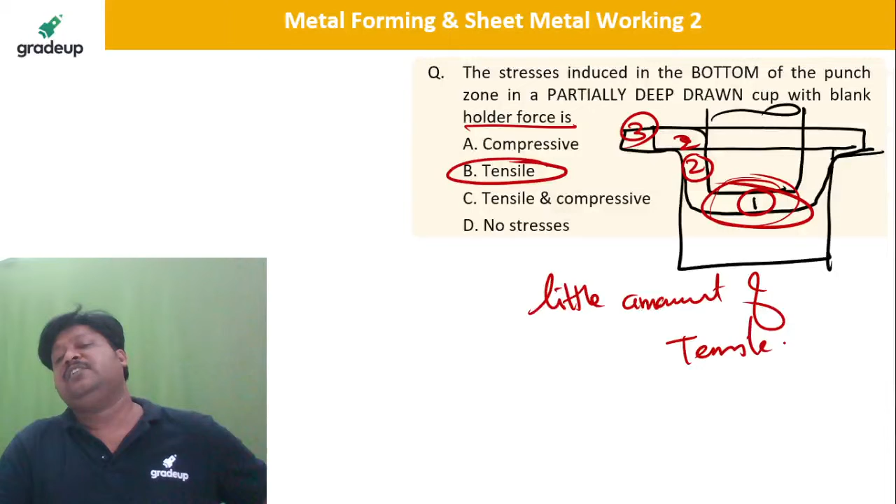But when you apply the blank holding force BHF, there are slightly small tensile stresses. Without blank holding force, there is no stress at all. But with blank holding force, at the bottom of the punch at position 1, there is a little amount of tensile stress only.

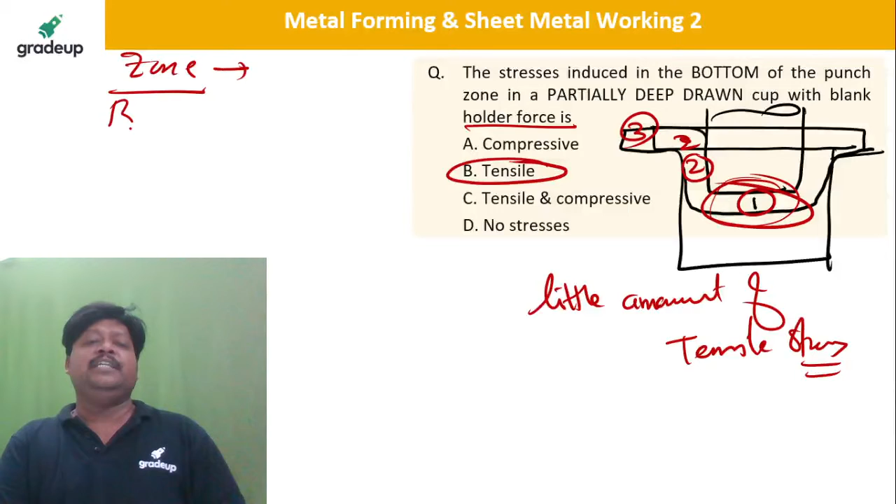In zone 2, the deformation zone, whether BHF is applied or not, the forces or stresses induced there are pure tensile only. So now go and read what the stresses are, with or without blank holding force, at the flange portion in a partially drawn cup.